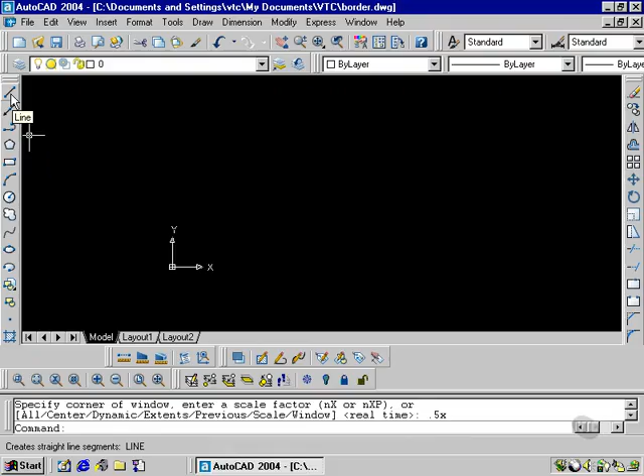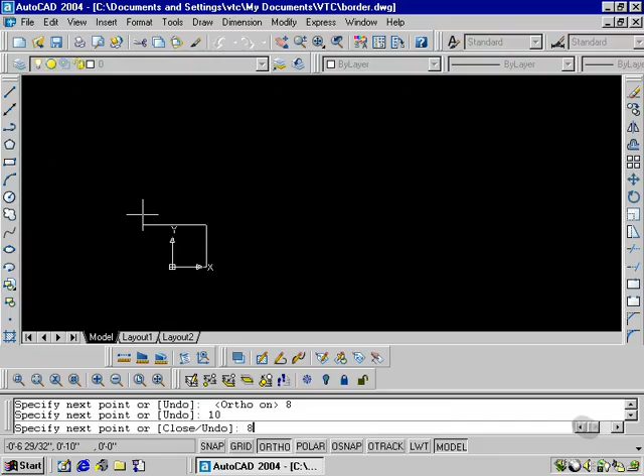Beginning with the line command, I'm going to begin at 0,0 as always, turning ortho on, taking my cursor to the right hand side, typing in 8 and enter, going up 10 and enter, across 8, enter, and then C for close. Now I'm going to zoom extents and zoom real time a little bit here.

I think what I want to do also is place the UCS icon back in the lower left hand corner. Let's turn off origin. And I'm going to be placing the title, the project title, down here.

So I'm going to offset a line. Well, I selected copy. That's okay, I can copy it as well instead of offset. I'll select this object to copy. Right click, base point here, and take it up 1 inch.

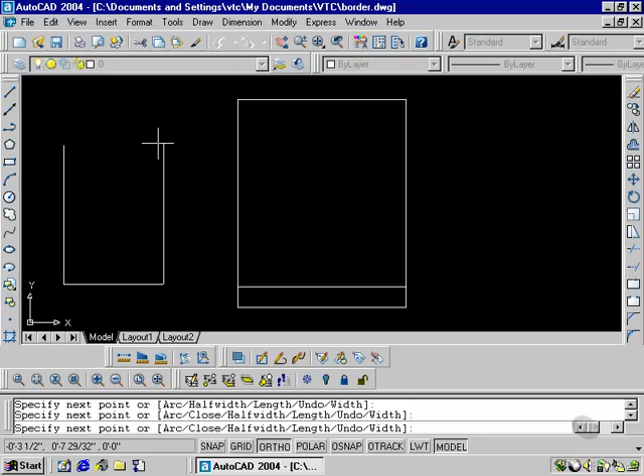Just like that. I know I could have started with the polyline command, but if I create the polyline, turn on O-Track here for a moment, and O-Snap.

If I begin creating this as a polyline first, and then if I try to offset 1 inch like I was going to do here, you'll notice how it offsets the entire polyline. And that's not going to work. I would have to explode it and then put the line in and then go back and convert it.

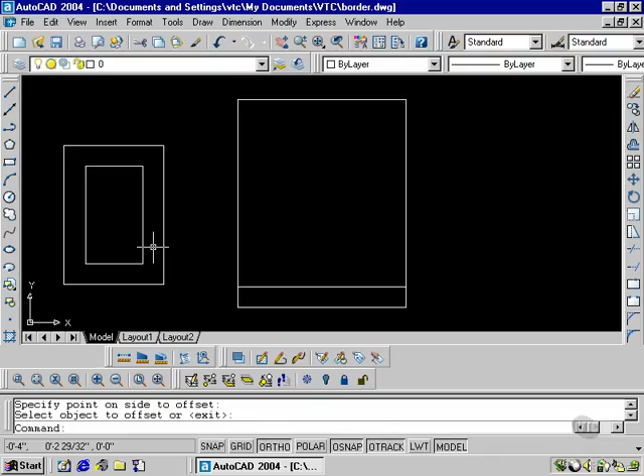So it's best for me right now, as I'm in the planning stages of this border, to create it as individual segments and then come back and edit.

So now that I'm ready, select Edit Polyline. Select the polyline. Of course, it isn't a polyline yet. It will be, but I will go ahead and select it. Do I want to turn it into one? The answer is Y, yes. So enter.

J for join, because I'd like to join the other segments, and enter. Notice how it is not possible to select this line segment because it does not have a common endpoint with the others. So now I enter.

And the next thing I want to do is give my border a nice thickness. So I type W and enter, specifying the new width for all segments. I'm going to make it 1/16 thickness and enter. And as you can see, it has changed on screen to reflect that width.

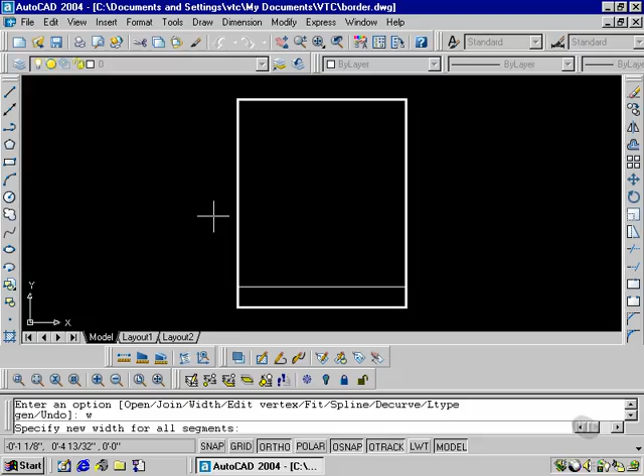If I didn't want 1/16, if I wanted a different value, since I'm still in the pedit command, I can type W, enter, and change it to say 1/4 inch. And that will be a little much, so typing W again and enter, 1/16 and enter. I could have typed U for undo. Either way, it still works. And finally, I can enter to terminate the pedit command.

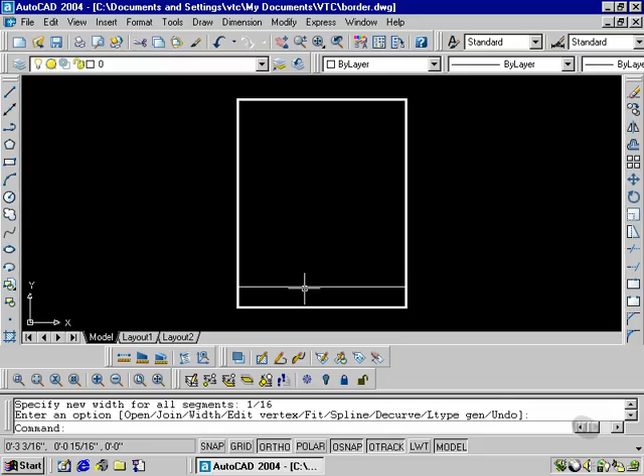There we go. Let's do the same thing for this line. Let's give it a thickness. It is a line, but I'm going to convert it into a polyline. Now, a polyline can consist of a single line, and that'll work just as well. Edit polyline, select it. Yes, I enter. Type W, I can't join, so I skip that portion, so W, enter. And I'll make this 1/16. There we go. And enter again to terminate the command.

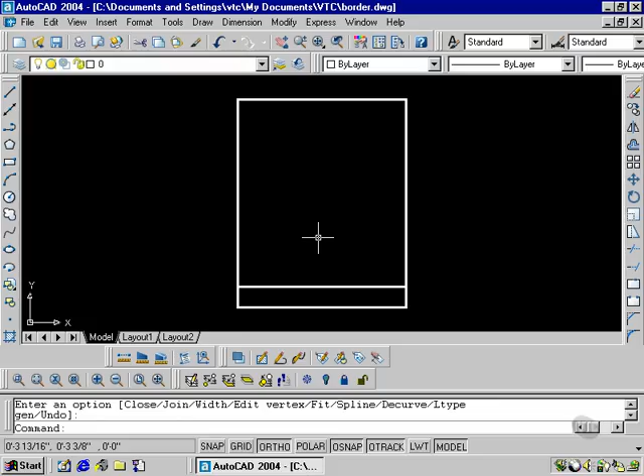And if I zoom window, you'll see the thickness. And when I print it out, it will come out to 1/16 thickness. And that's what I wanted.

One thing I did forget to do, and that is to create a new layer. We're going to call it border and leave it at white. Make it current. OK. And then select change to current layer and select, and enter.